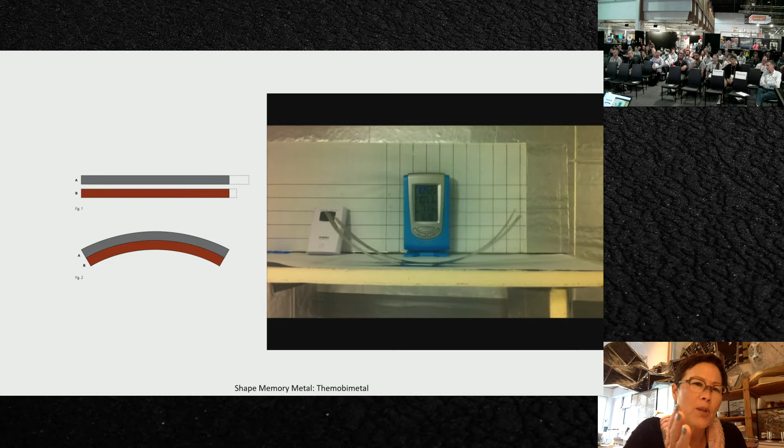So the smart material that I work with is called a thermobimetal. It's a lamination of two metals together, and they have different coefficients of expansion. They're laminated so that when the temperature rises, one side expands more than the other, and the result is a curl.

So I use this curl for many different things, and you'll see as we go through. But in order to use that curl and some of the technology today, which is both computational as well as structural, I look a lot and gather a lot from geometry.

This is another part of my background that I have an inclination for, and you'll see that there's a strong sense of it, both in the small parts and how we tessellate the parts together into a tiling pattern, or how the overall structure is made in such a way so that it follows more like shell-like structures or minimalist surfaces. The combination of the original geometries now, again, with more complex geometries, the fact that we have computers or computation to be able to determine these shapes really helps a lot in my work.

Okay, so there's the different parts of SMART that I use: the SMART geometries, the applications, the assembly systems. And you'll see as I talk about them, these things are actually woven together and hard to separate whatsoever.

So now I'm going to go back to this idea of moving targets and try to make a connection of these four different parts to my own work. What you'll find is that the four parts aren't very distinct, that there is overlap in all of them. But because these four things are very important, I think, in all of our lives right now, I want to point out that they are inextricable from my work as I work forward from it.

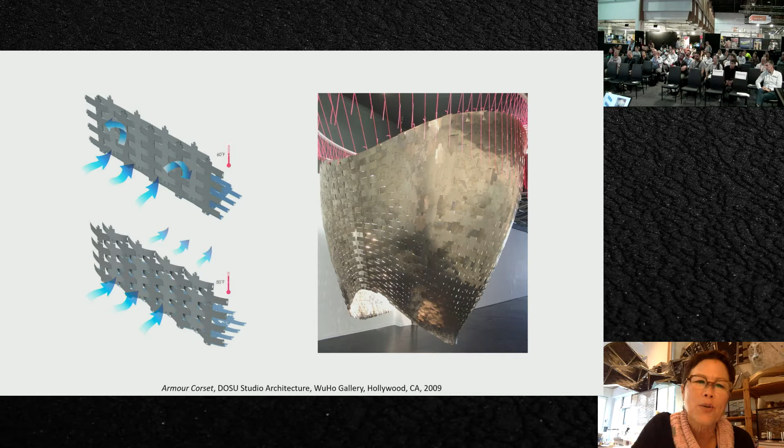So you can see here the basic pattern. The overlap you'll see with other topics I talk about is the idea of how this can perform. In this case, it was for ventilation. The idea was to make this surface taut when cold and very porous when hot, allowing ventilation to freely pass through—trying to think about how a solid surface can open up.

So here you can see the tessellation from the inside. I also try to incorporate ideas about structure so I can eliminate structure. In this case, it's a completely catenary curve that's hung, with a slot-and-tab type system for attaching the whole thing. We were able to put these pieces together very quickly, which speaks to this idea of efficiency, assembling an entire surface in probably 4 or 5 hours.

You can see here this idea of ventilation. On the left it's cold and a little more taut, and on the right it starts to contort to allow air to move through in a rougher, basket-weave type of effect.

This idea gets translated in many different ways. I'll show you projects that jump around in time, since there's no real sequence to how I present the work, but they all connect through the fact that many are made out of thermobimetal. This one is called Oculus. It draws inspiration from flowers, like iris flowers that open and close—not really a predecessor, but along the same lines of this ventilating idea of how to open up things.

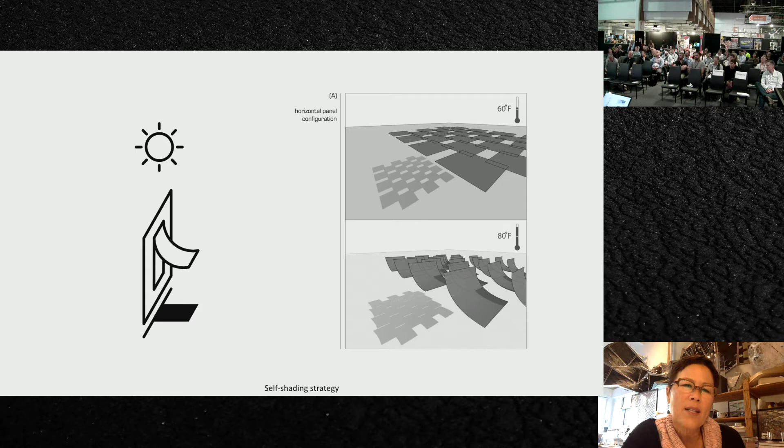You can see here we clad the entire surface with the thermobimetal. The idea was that it can actually shade when it's in certain formations, and it can also ventilate out the surface. You can see that in the diagram here.

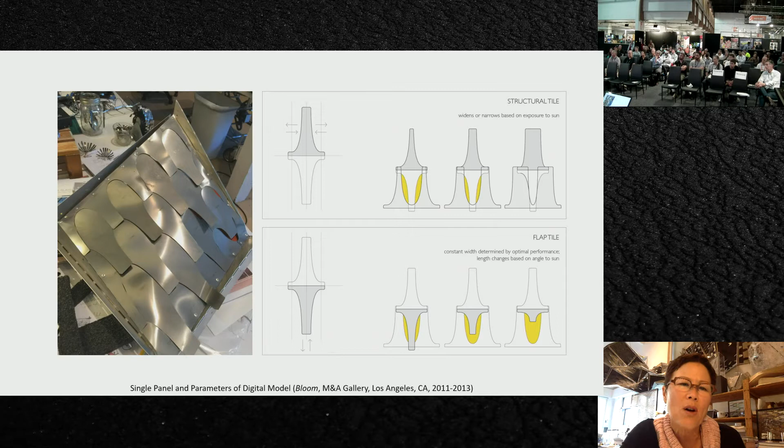We connected it at that time to Grasshopper—this is very early Grasshopper, in 2011. I'm sure some of you might use that program, but it was unable to do a lot of things because it was so brand new that we worked with the company to develop their connection to the software. You can see here we were able to parameterize the tiles so that they could be long and narrow or shorter and fat, depending on where it was in the model.

The structural component is more like a monocoque structure, where it's reliant on both the surface as well as minimized structural components. We had to design it because we build everything ourselves—we don't have any contractors come in to help us whatsoever. All these things were made out of small pieces, small tiles that made the squares, and we put the squares together.

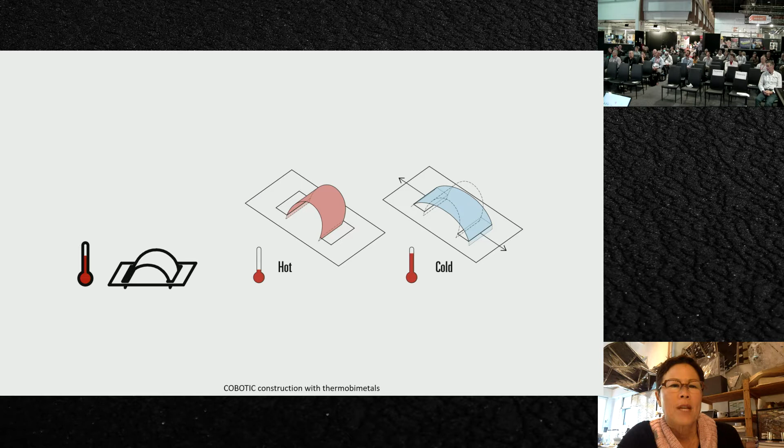This idea of economy goes a little further into what is called cobotics. Cobotics is a word that's a combination of collaboration and robotics. So you get the cobotic, where the piece itself, when you assemble it, helps itself become assembled. It's a combination of the effort of the person assembling it as well as the material itself—a slightly different way of thinking about how materials can actually be part of the assembly system.

So the first proposal I made was for the Museum of Contemporary Art in Los Angeles. They commissioned me to make this pavilion that would sit in their space. That was actually a really bad summer for them because they almost went bankrupt, so we had to put that project on hold. But the nice thing is the Museum of Contemporary Art in Santa Barbara, California, picked up the project.

Because I'm a researcher, I don't necessarily consider myself an artist, even though I like to do it. I thought of it as an opportunity to rethink the idea further. At that time, I was thinking structures came down to basically two things in architecture: it's either a column or a beam, either a tower or a bridge. So if we're going to test this idea structurally, why not choose one of them? Because of the space they wanted us to put it in, it was more likely going to be a tower or something vertical.

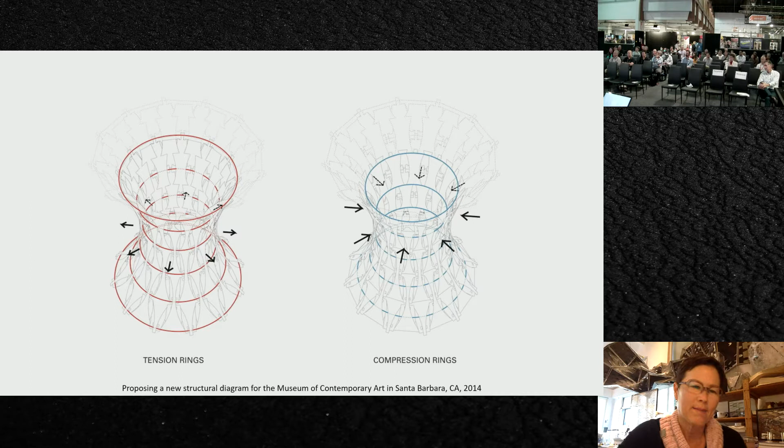So you can see here we took the same basic idea and put it into this tower situation. And what it is, we're not forwarding... now I'm stuck again. Okay, sorry.

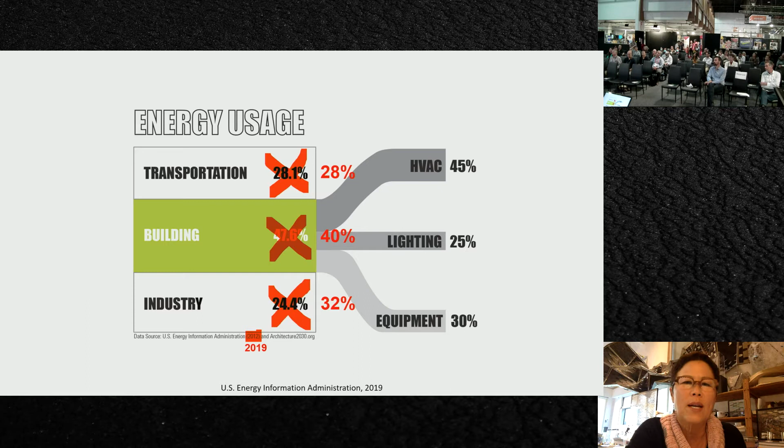The other problem, I'm sure you've all heard about, is the heat island effect. There's too much concrete and too many hard surfaces in cities, so they're not able to cool down at night to start a daily cycle. It's exacerbated by this problem with air conditioning: as temperatures rise, people start to use air conditioning, and use more of it. In order for air conditioning to cool the interior of a building, it has to give off hot air into the environment—so it's also heating the environment in addition to not allowing it to cool down.

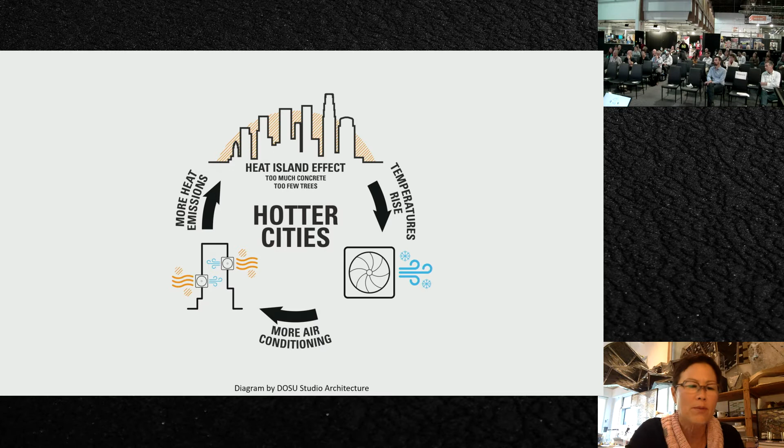Here's a US statistic that is really quite alarming. 9% of all US energy in 2018 was used on air conditioning. 12% of the total commercial sector electricity consumption was used on air conditioning. This is just air conditioning alone, mostly in commercial buildings and a little on residential. You got to think, wow, what are we doing?

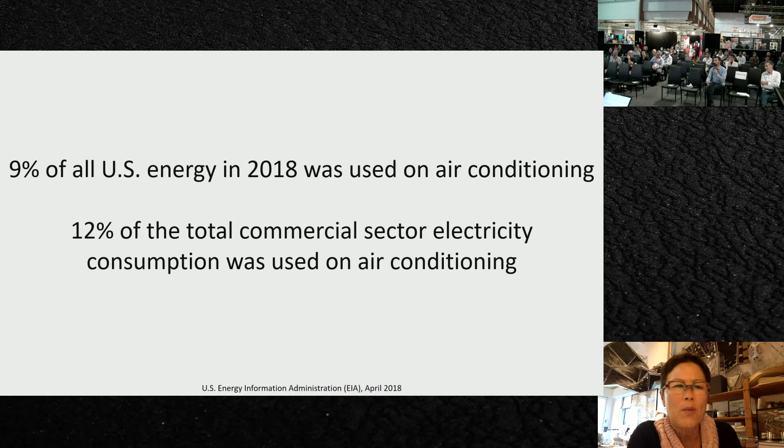The termite mounds are also very smart. They have an entire system of pathways where, if they want to ventilate the place, they leave all the openings unplugged to cool it down. And if they need to warm it up, they plug up some of these holes to seal the air inside. It's a very simple, very smart system.

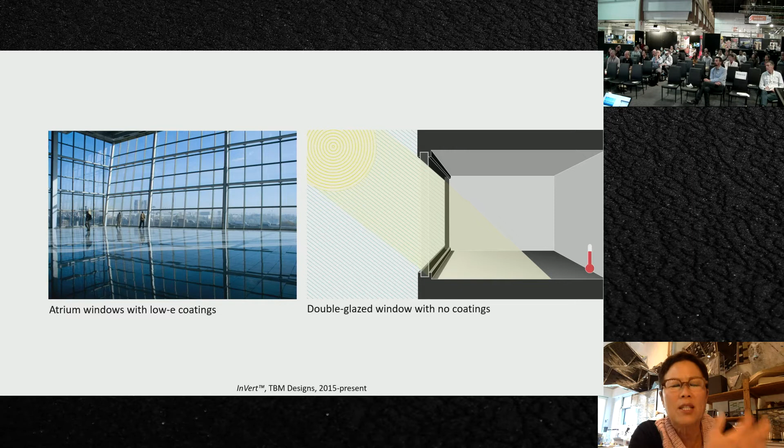So trying to think about smarter ways to operate, I talked earlier about the building envelope and dealing with areas where we have big problems. One is the window system of buildings. Here's the typical problem: everybody wants floor to ceiling, 360-degree views. But no matter how much you condition that space, the sunny part is still going to be warmer than the shady part, and you still have to pump a lot of air conditioning to compensate. You see that on the right side when the windows have no coating on them, you get a lot of heat gain through those windows.

Low-E coating works great and is very affordable, but it's becoming problematic for wellness because it's like wearing dark sunglasses indoors all the time. Studies now show it's very poor for wellness, and we have to rethink how we spend our time indoors with those coatings. Electrochromic glass too, although it seems dynamic, when it shuts down it sometimes has a color tone to it, and in other cases it completely cuts out all visibility in order to block the sun.

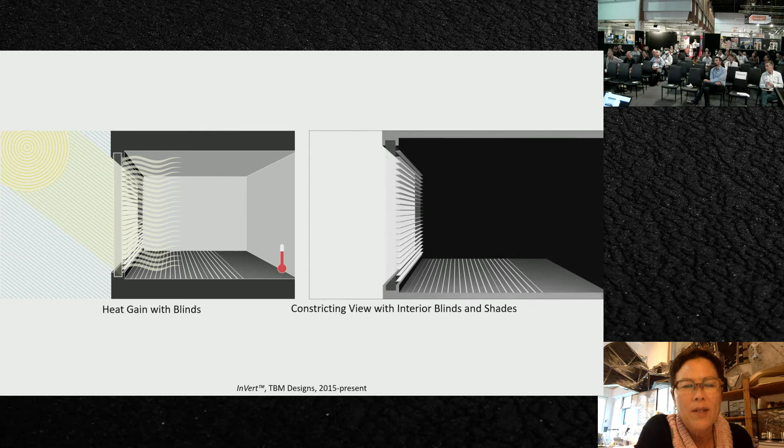Blinds are a problem too. They help with glare, but they still allow that solar heat gain to come through the windows. And when you shut the blinds down, you lose a lot of visibility.

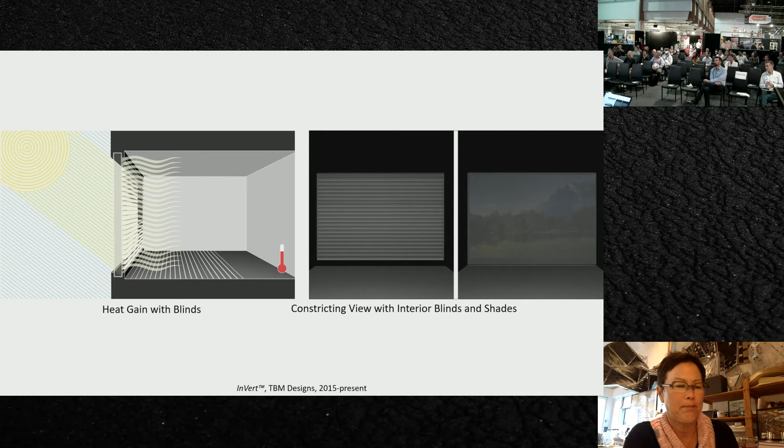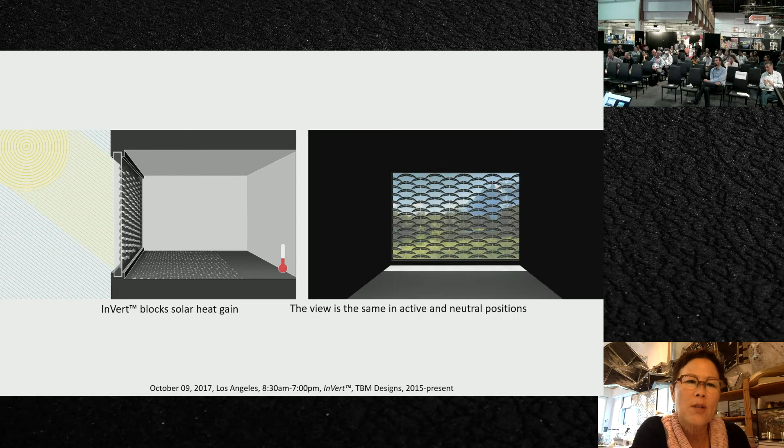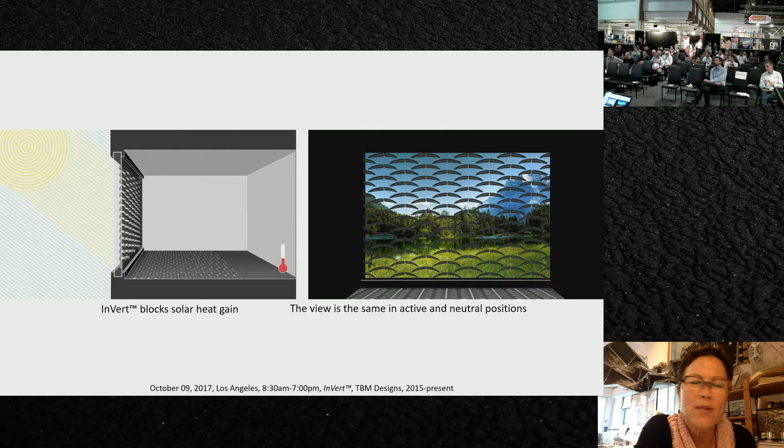So this product that I invented uses a thermal bimetal. We put it inside the cavity of a standard IGU, or double glazed unit. It basically reacts to the sun—they close, they flip over, as you can see, to block the sun. The great thing is that in either the open or closed position, the visibility is completely the same, so you don't lose any visibility when it's shading.

The system I use for the thermal bimetal is a toggling system. There's a curvature to it when it heats up, and we actually reverse curl it so that when it's cold, it's in one configuration, and when you heat it up, it reverses and is able to flip over.

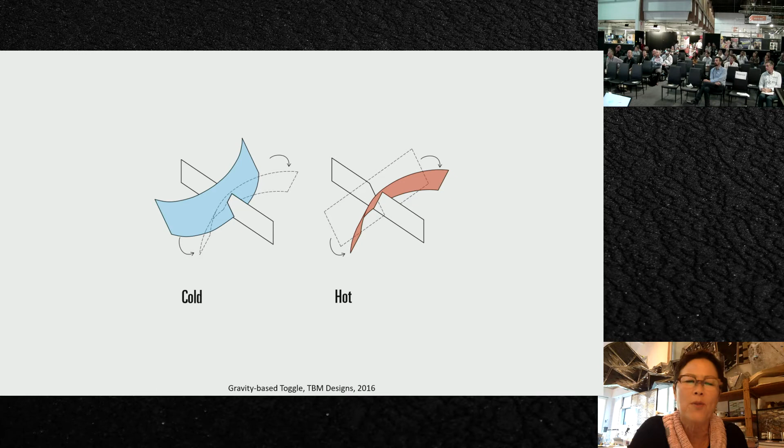Here you can see a close-up of it. They can actually flip independently and individually, so they don't all flip together at the same time, but within about 10 minutes the entire system responds. They're very beautiful, and a lot of people connect them to being natural, almost like butterflies inside the window.

Here you can see it in a time lapse over the course of a day. As the sun comes in and hits the surfaces, they start to flip over, and as long as it's sunny, they stay in their operational shading position. Then at the end of the day, as the sun leaves and you get more shade, you get more light coming in.

Here you can see the different configurations. The facade or the building can change throughout the day, depending on how many pieces are open or closed. This is actually a view in the wintertime. So because it's cold outside and the sun is not at its strongest, it will allow the heat to come in and passively heat the interior.

You can see they're not flipping over—that's wintertime. And this is the summertime, you'll see it flip over at a certain position and shade the interior. They react to the sun, staying closed until the very end of day. But the nice thing you see in this imagery is that the view or visibility outside basically stays the same whether it's open or closed.

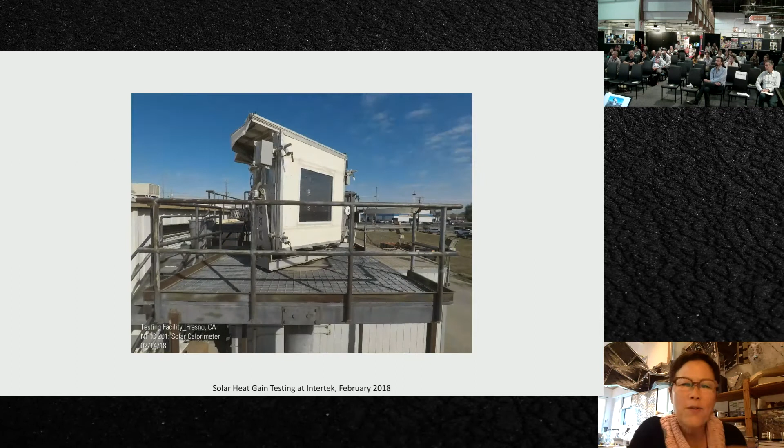We've gone through different kinds of testing and certification. You can see here at one of the certification centers in the United States, we actually went up to test our windows and got some really great results out of it.

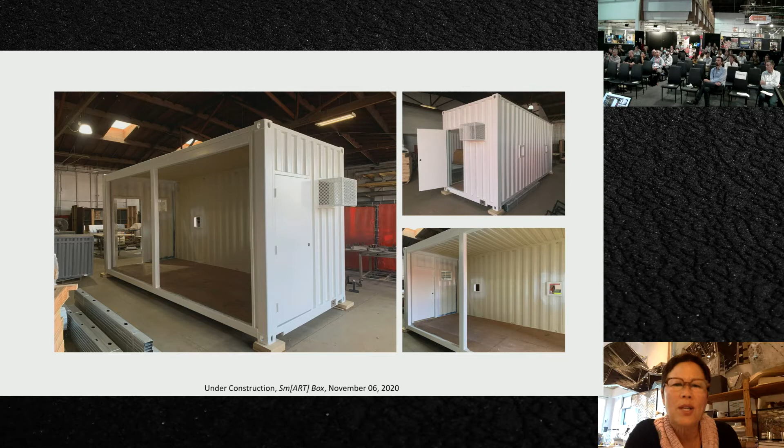We have a lot of awards this past year because now we're at the point where we're piloting it currently, and then early next year we are going to start putting it in for early adopters. So this is the pilot that's actually going in tomorrow. It's going to be at an architect's office in the Los Angeles area. And then in a couple weeks, we're actually putting it on the Cal State Long Beach campus. We're using a container to put it in so we can use it as a real-life testing center.

You can see it here in the making. Long Beach is also one of the largest shipping ports in the world, so shipping containers are pretty readily available there. We're also recycling some of those shipping containers to do this.

We're partnering with an artist named Yalu to basically clad the entire shipping container with artwork using a vinyl wrap. The four windows on the front are going to be the invert system I just showed you. Because we have all these pieces and can color them, we can actually pixelate the imagery—we took some of the artwork and ran it through the window. On the outside it has this kind of opacity to it, but on the inside it looks the same as before, so you can keep the visibility when open and when closed.

The container is not inhabitable except for testing, so we put these windows on the back that you can look through and see the system.

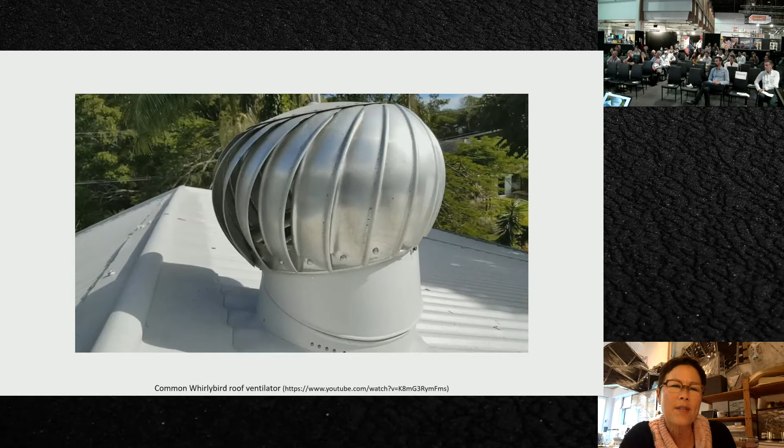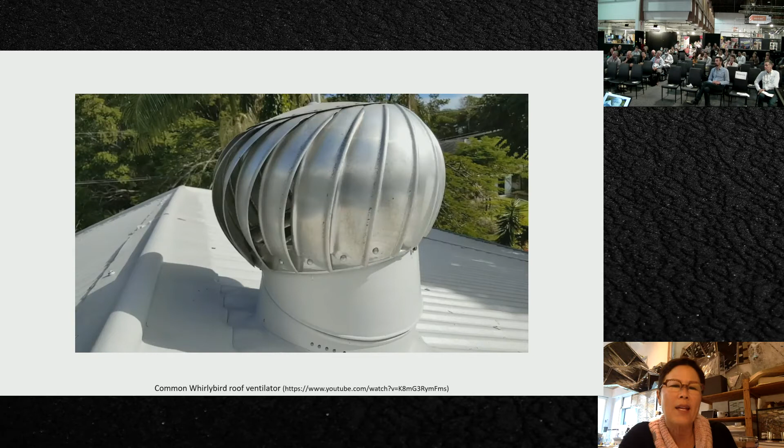Okay, so the last thing I'm going to talk about is this idea of health and wellness. It's something I'm very much consumed with, not only recently because of the pandemic, but for a couple years before that.

If you start to look at how architecture basically correlates with the food industry, on a very basic level, historically—long ago, food was used for fuel. Then, as cultures became richer and economies developed, food became more about gluttony; the more of it you had, the richer you were somehow. More recently, there's this idea of food for nutrition—everyone's now trying to eat healthy, this idea of organic, all these different kinds of diets we can go on and on listing. But this interest in eating food for health was really important.

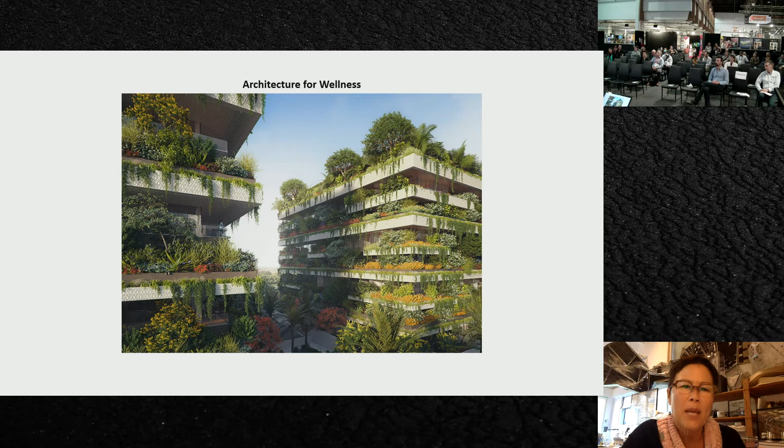Part of the research I'm working on now with a big team of people is this idea of dealing with air pollution. The way we look at it is that architecture in the city basically has all this surface area. I talked earlier about the heat island effect and the hard surfaces we worry about, and how a lot of that hard surface needs to change, like highways and sidewalks. But what I proposed to the National Academy of Engineering a few years back is: why can't we use architecture surfaces on the outside for infrastructure for the city? Why aren't these surfaces being used for the good of the public, as opposed to the interior occupant or the developer? So typically it's used for branding.

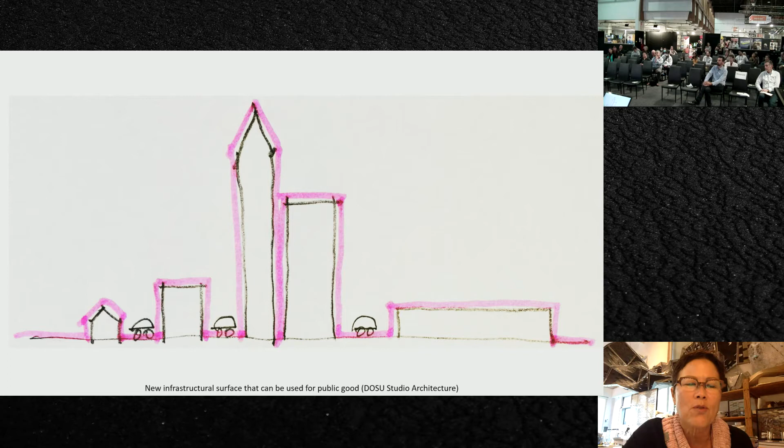We try to make it look pretty as a building. At best, as a performance criteria, we use it to filter things to the inside, as I showed you with the invert windows or for ventilating. But my new idea is, why can't we use this for the outside, for the pedestrians, for the people who are outside and not inside the building?

In the case of urban canyons and smog, most of the particulate matter actually sits at the lowest level, which I call zone 1 at the bottom. The mid-level, zone 2, and the highest level are where we don't have to worry, because pedestrians aren't typically there, and it's also much less smoggy in those zones. So it's that lowest area that becomes the biggest problem.

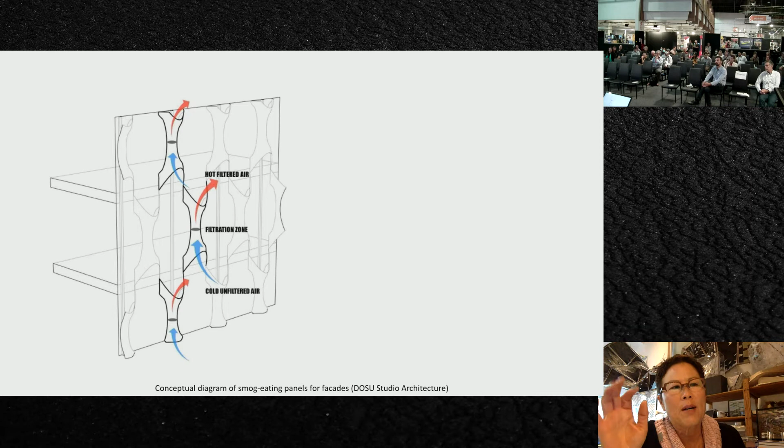So my first idea is to try, in a very passive way, to filter air so that building facades can actually be a filtration surface for the city to eliminate smog. There are two levels to it: particulate matter as well as gaseous smog. Using Bernoulli's effect, prevailing winds, and the chimney effect, we try to move air as fast as we can through the surfaces, through the pores, so we can filter both. Filtration happens not only with an actual filter for particulate matter, but also through the inclusion of materials like titanium dioxide into the surface, so we can deal with the gaseous matter too.

So here we are — this is ongoing research. We're not at any product quite yet. A lot of my work ranges from very basic science all the way to commercialized products, but in this case we're still working on it. I just want to show you the stuff because I'm excited about it.

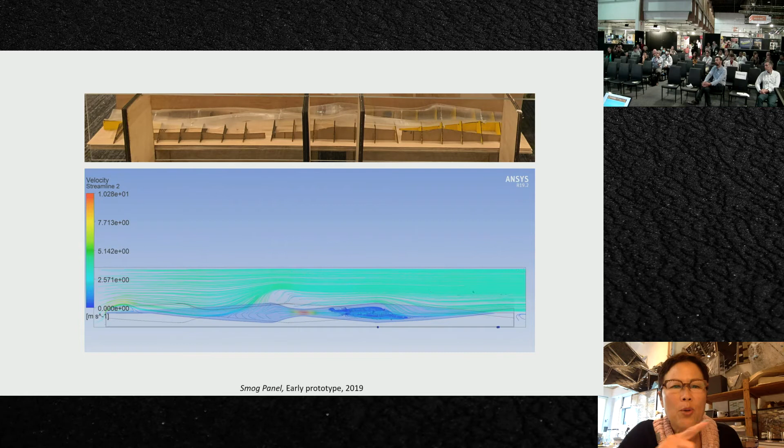We build our own wind tunnels. Here you can see a preliminary tube on top, a very clear resin 3D print that we built, sitting inside its wind tunnel tube. On the bottom, you can see some of our simulation models showing how air actually moves through the surface and across it.

Eventually, we're going to get to the point where we can tessellate the surface with all these different tubes so that air can move in and out of these holes. We still don't know what scale or size these tubes will be, because we're just trying to control the air and figure out how to get the maximum amount of air through it. So these tubes could be, I don't know, 20 feet long, or they could also be half an inch long — we don't know quite yet.

What we want to do next, going back to social equity and climate and all these things, is to design bus shelters that could be anywhere in the world. These bus shelters can actually be 3D printed. We're working on how to use local dirt in these 3D printers so they could be printed anywhere, assembled, and work passively, with no energy required, low cost, and no issue with theft. The idea is to give the freshest pocket of air to the people who sit there waiting for buses, and that way we bring equity to everybody.

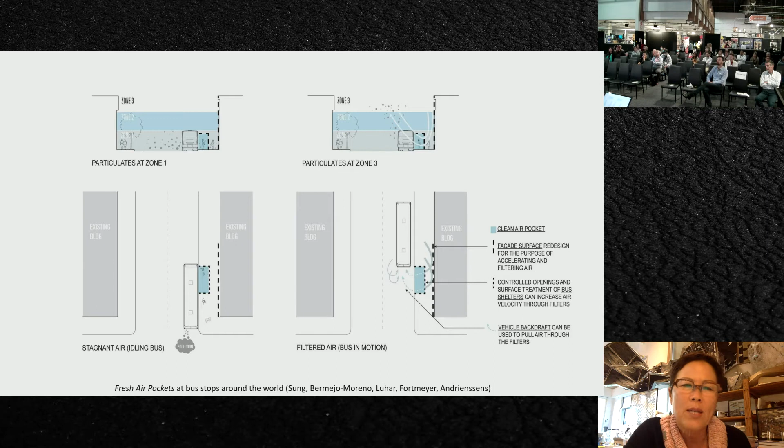When we started making these little critters, we realized they make us smile or they make us laugh, and we actually give them names, and we have our favorites. We start to feel really connected to these pieces. So at first I thought, how is this going to ever affect architecture? We're not going to make architecture walk, when we're this basic.

But we can make architecture move on the surface. And when we start to do that, it made me really think: does architecture actually have implications to the public too? Can we actually love our building, or does it have some emotional value that's going to evoke from us? This project came out of that and made me think about another level of what we can do for architecture and how we can use architecture for mental health.

This idea is in its very early stages, and we propose on getting funding for now. If we can actually make a facade change and move, and if we can have some emotional attachment to it, then what if we can make it smile, basically?

If we can actually find the gesture of smiling just as a contortion on a surface, and if people can smile back—if one person, if 10 people, if 1,000 people can smile that day—basically through studies, when you smile, you've improved your own happiness, your endorphins come out, and therefore we can possibly raise the level of mental health in a city.